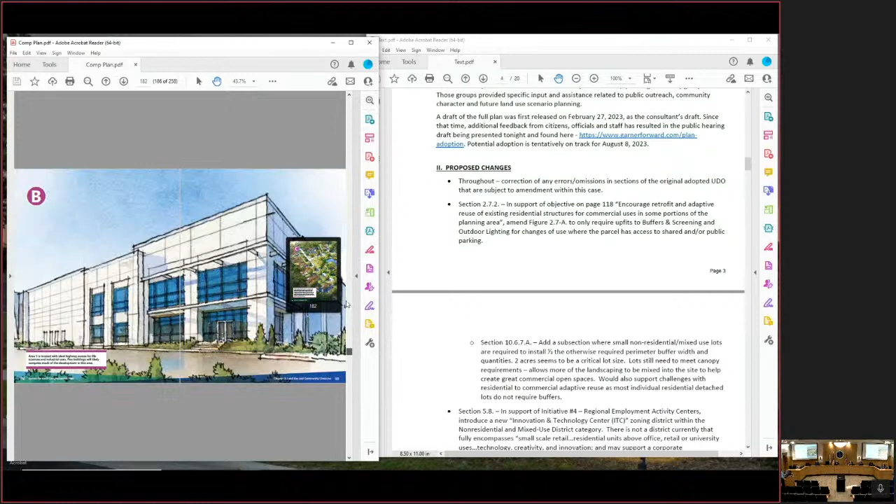What we did here is organize the amendments chronologically by section number, but also group them so you can see which amendments play together. The first one relates to page 118 in the document, and I'll try to forward these and keep them together. Let me see if I can switch to a single page view.

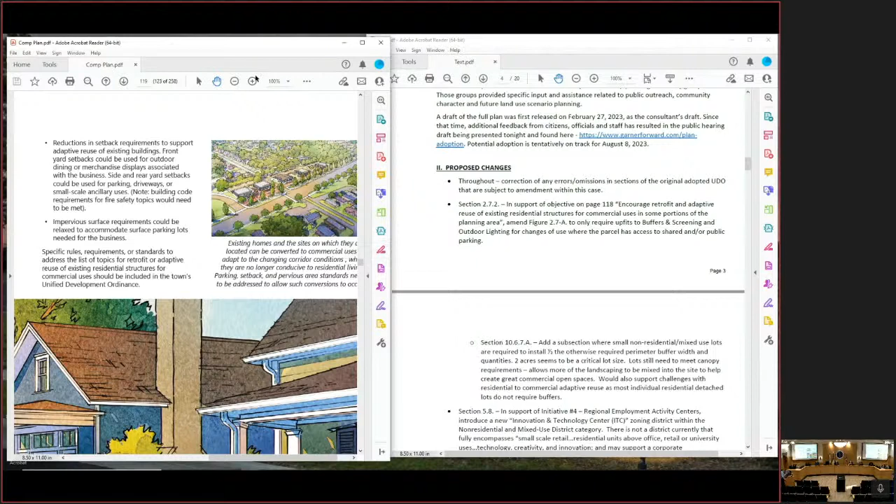And I can't see my page number. That's not good. Just a touch. Well, it's not 120, 118. Okay, so there we need to go.

All right, so one of the objectives there, and when I'm saying the objectives, I'm referring to the green text, which is what Matt pointed out to you would kind of form the rubric of what we would be examining future rezonings against, kind of somewhat similar to the list of items that you get at the end of your staff reports today. And so the goal there, or the objective there, is to encourage retrofit and adaptive reuse of existing residential structures for commercial uses in some portions of the planning area.

So currently in the UDO, that's not a very easy process to go from residential to commercial. There's a number of building code issues that come into play already, but the zoning ordinance also makes it quite laborious. Specifically, the nonconformities chapter, section 2, treats those as a change of use, and that change of use then triggers virtually almost complete compliance with all the regular standards of the UDO, which, as you can imagine, standards for residential when it comes to everything - parking, landscaping, lighting - is much different than for a commercial parcel.

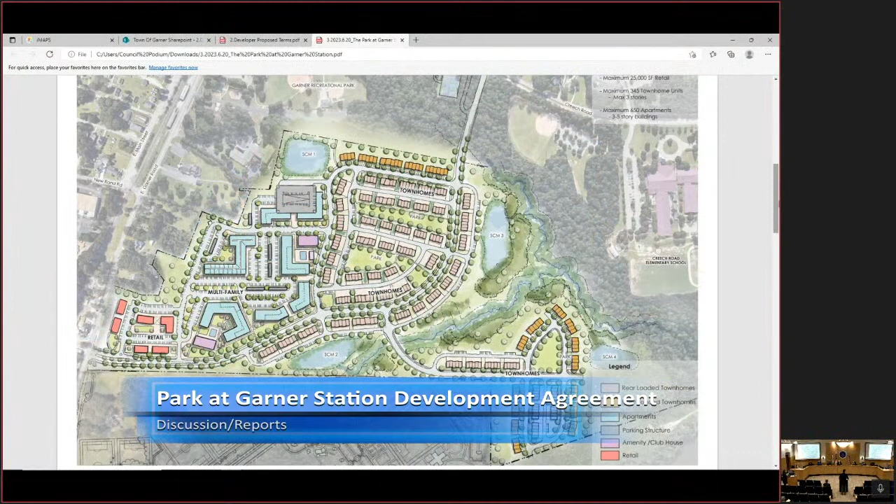I'm Matthew Carpenter with Parker Poe, 301 Fayetteville Street in Raleigh. As Robert mentioned, the overall project here is the Park at Garner Station, a large mixed-use project with commercial space, apartments, and townhomes covering over 97 acres on East Garner Road. It's a really large project, and projects of that size require careful planning and coordination that we've been going through over the last year or so.

With such a large project, there are often multiple stages of approval, and two of the early stages are what we're in now: the planned unit development rezoning, which is currently pending and still under staff review, and then the development agreement, which is the focus of discussion this evening. Although those two processes are related since they're for the same project, they are separate items that require separate hearings, as the town attorney mentioned, and review cycles.

Over the last several months, we've been working with town staff and the town attorney's office to get to a term sheet that we felt was close to the final terms we're going to put in the development agreement. The goal of that term sheet is to set the stage for the formal development agreement that we'll draft after tonight's meeting. The goal for tonight is to get your initial feedback on those terms, and then take that feedback back and incorporate it into the development agreement as we move forward.

For that reason, we might not have answers to all of your questions tonight, but it does allow us the opportunity to hear your concerns and comments before we get to the public hearing with the development agreement and the rezoning application. In that same vein, there are a lot of conditions in the PUD text that are zoning conditions that will apply to the property. Since those are part of the PUD discussion, we won't delve into all of those tonight, but you will hear about those over the next couple of months.

One of those improvements is the major collector street that you can see on the plan that connects the project and Creech Road. The goal of that collector street is to improve overall connectivity by establishing an east-west connector there, and then also completing a street that's shown on the street plan. It also serves as our second point of primary access that's required under the code. The plan is for the developer to fund and construct the entire portion of the major collector, and we're not requesting specifically for the town to pay for that road.

One of the challenges is that the location of the road goes over Garner Recreational Park. Because the original funding for the park received federal funds, we're required to pursue a permit to build the road over the park property. What we're asking for in the term sheet is for the town to work with us in obtaining that permit from the State Parks Department. It's actually issued from the Federal Parks Department, but you go through the State Parks Department, so several different bodies will be involved. We're not asking to completely finalize that process now—the term sheet is just asking for the town to collaborate with us in filing that application.

We're also constructing a local street along the shared property line with Yeargan Park. The goal there is we've worked with staff to line the edge of that street up with the property line so that Yeargan Park can easily connect to that street when the time is appropriate to provide cross-access. We think that'll be a better cross-access connection than the dead-end street that was previously planned. There are also several Parks and Rec improvements contemplated in the development agreement term sheet.

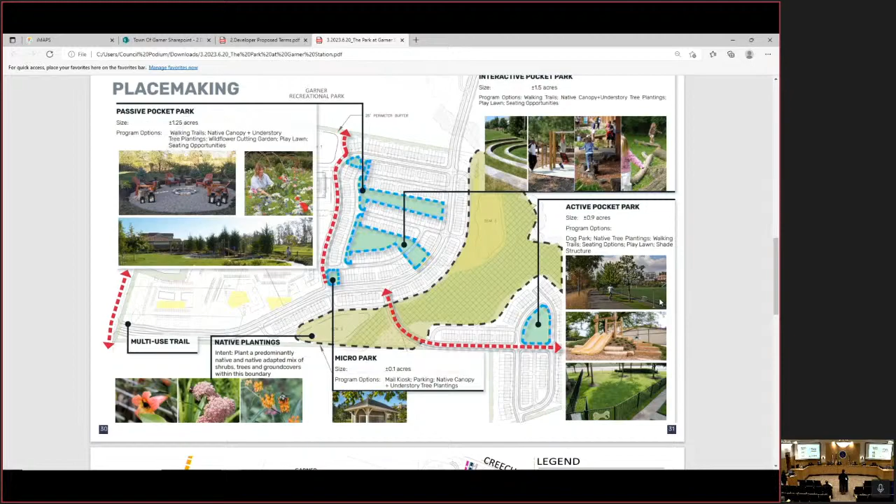And it's not surprising since we're surrounded on all sides by parks. So one of those commitments is that the developer will construct two public multi-use paths across the property. One of those will extend across the Garner Recreational Park property to connect the park with the development, and then ultimately to Yeargan Park.

So there are several, and those are just the Parks and Rec improvements in the term sheet. There's a whole slew of open space and parks commitments in the PUD that we'll discuss at those hearings. And then finally, the term sheet also addresses sewer improvements.

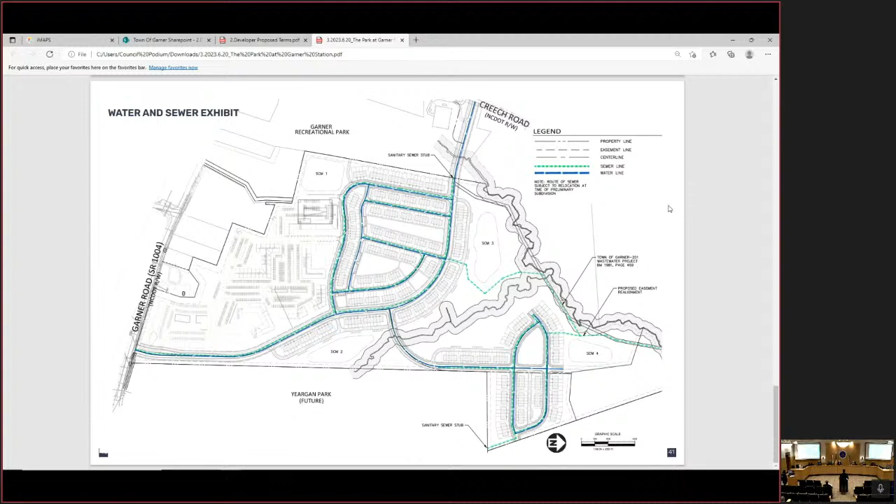For this project to connect to sewer, the developer will be constructing over 1.2 miles of sanitary sewer. It's to the north of the property, to the right of your screen. That's a big part of this project because it's a ton of linear feet of sewer connection, and it'll also help with the Yeargan Park connection.

I know there was a lot of money as part of phase 1 of Yeargan Park to make a sewer connection, and these improvements will allow the park to connect to the nearby Pulte project, and hopefully save some capital expenditures there. Part of the process for obtaining approvals to build that sewer extension is that we've got to obtain a permit from the Army Corps.

Because a lot of the extension is through the creek north of the property. So what you'll see in the term sheet is that we've asked the town to work with us on that, and there have been some further discussions today between staff and Mr. Shunk on exactly what that will look like. It's also probably going to require some coordination with the City of Raleigh. So in that sense, it's kind of an agreement to agree to get the sewer done to the north of the property, which will benefit the project and Yeargan Park.

So overall, we think we've reached a term sheet that provides the developer certainty that the town will work with us in pursuing the needed improvements, and also provides the town certainty that the project will be built and the significant public contributions to the infrastructure will be realized. So with that, we appreciate your time tonight, and we're happy to answer any questions.

At the intersection of New Rand Road, through conversations with John Hodges, we've met with the North Carolina Railroad. We will be putting in a traffic signal at New Rand and East Garner Road. And there will actually be two signals, one at New Rand and East Garner, and one at New Rand and Main Street. They will be signaled and timed all together. It'll act as one, but you'll see two actual sets of lights there.

The signal design and the signal installation itself is going to run about $1 million, and all of the improvements from New Rand down East Garner Road is going to be about $2 million of improvements.

And all those improvements are going to be on the north side, as it should be, correct? All of the improvements will be on Garner Road, on the north side. There'll be an eastbound... getting the maps turned, I'm getting my easts and wests confused. But anyway, there'll be an eastbound right turn lane off of Garner Road onto New Rand Road.

The reason I bring this up is years ago, Wake County School System was looking at putting a high school here. At the time, with the traffic from a couple thousand students, you'd have 1,000 homes and a couple thousand vehicles, and one of the proposals was going to close the New Rand Road intersection. That was back then, not very popular. That's why the town got on board and helped them find land elsewhere. So that's one big concern I have, the impact and the improvements on the road, because that was how they were going to try to alleviate issues by just closing that intersection, which would have been devastating for the downtown.

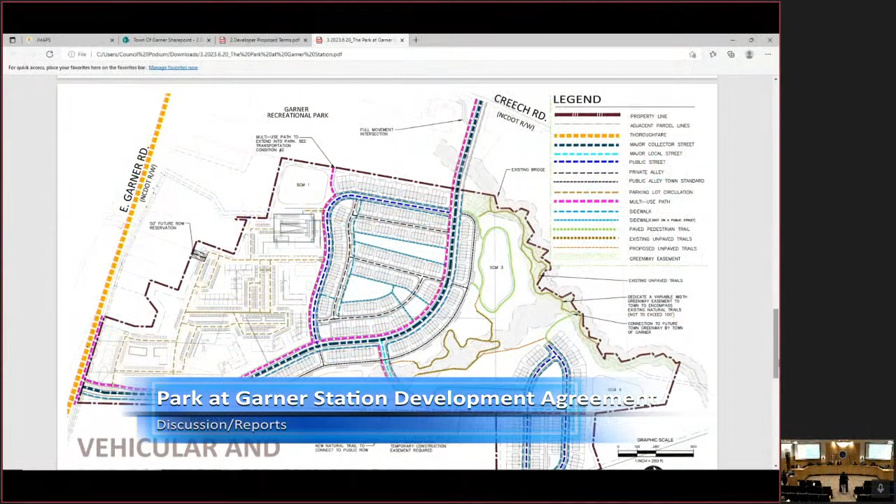So what you're saying, there'll be a 3-lane section between our entrance and New Rand Road? Right, a lot of opportunity for queuing. And then at Creech Road, there'll be a southbound left turn lane onto the collector. So you'll come past the elementary school, and then there'll be a dedicated left turn lane to turn into the collector street. And that'll also relieve the intersection there at Creech and East Garner.

You talked about road improvements going west on Garner Road, up to New Rand Road or past it. Will there be improvements some distance past New Rand Road? No, the only improvement on the other side of New Rand Road will be an eastbound right turn lane. So if you're coming from the Performing Arts Center, as you approach New Rand Road, there will be a dedicated right-hand turn lane. That allows people to keep going straight eastbound towards Jones Sausage, and there'll be a turn lane for people to turn south on New Rand.

Okay, let me see if I'm hearing you correctly. You said signalization—are we talking about stoplights? Yes, ma'am. There is a pedestrian crossing marked there, but it's impossible for anybody to cross as it is now. Do you anticipate that will be a safer option with the stoplights? Yes, there will be a stop control there.

I live in the area, and one of my biggest concerns is that section of road from Jones Sausage Road all the way to Creech Road is a speedway. People seem to floor it when they get in sight of the Creech Road stoplight to see if they can get through before it changes. So a stoplight at New Rand Road will certainly be welcome, but I'm concerned about the volume of traffic increase there. Also on Creech Road, the collector street coming out is not too far from where the road starts to curve significantly. I am concerned about people driving safely there and not taking into account the topography, which is less than ideal.

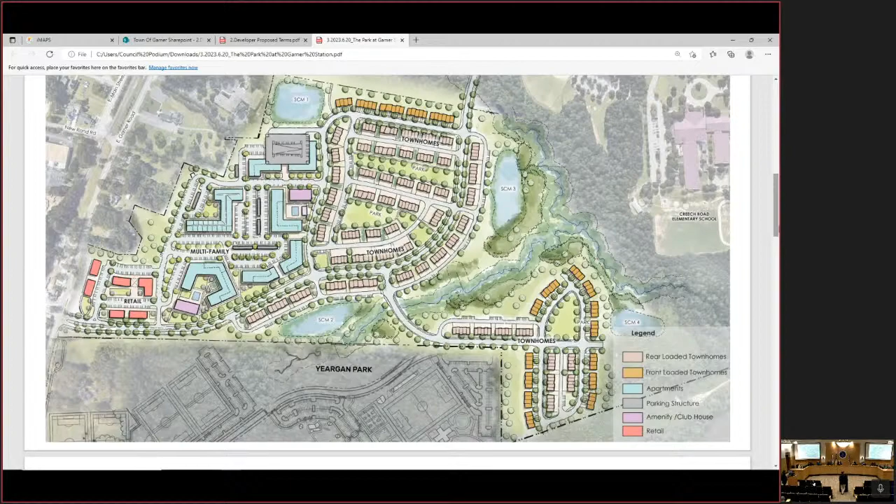I want to make sure that when it comes to us there is a real diligent calculation of that, because the PD is very specific about common recreation and usable open space, as it's worded. So usable is important, and the definition later in section 8.4 delineates certain areas that can't be considered. I just want to make sure staff looks at whether there's the adequate amount of usable recreation and open space.

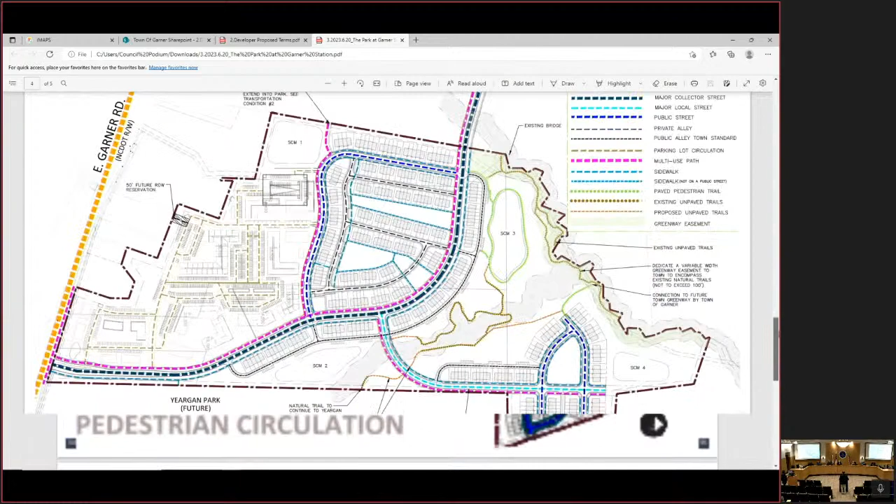You go to the pedestrian slide—go to the next one, yeah, keep going. When it comes time to the zoning, Mr. Dillinger, McAdams will be here, and since we first submitted this project back in June, we've received comments from your planning director, and those calculations were all vetted very well. The purpose of showing this slide here is—

The dashed line in pink shows all the multi-use paths, 10 feet wide, along the collector road, the local road, and also an east-west path connecting to the parking lot at Garner Recreational Park. In the open space area that remains all wooded, the tannish colors show a combination of existing trails and additional trails we're proposing. The green line going around that one pond is a trail as well.

So there is a considerable amount of pedestrian connectivity through this park. It's a little deceptive because your stormwater areas are not considered part of the open space. And if you remove those elements, it's very questionable if you're hitting the 25% of the gross area. So I really think we need to look hard at that.

I do have other comments, but I think they're more appropriate for a closed session based on some of the ideas related that they're permissible related to real estate. But I don't have any other public comments at this time.

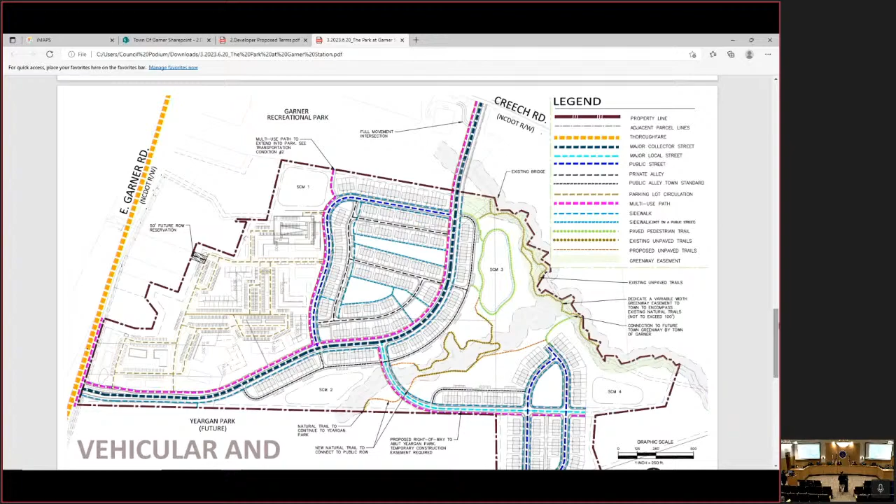It's the size and scale of a road where we don't want overly burdensome traffic calming, but there might be a way to reconfigure that road so it's on the other side of those properties, keeping all of the neighborhood on one side. Does that make sense? Yeah, I understand. I know you don't want to change it.

Yeah, so this gets more into the zoning, but your town staff asked for a certain roadway section to be built through there - a major collector section. That section was a 3-lane road all the way through with bike lanes on either side, and I have a problem that we sometimes in this country overbuild things. So we've had a few conversations with your staff about pulling that in, putting in left turn lanes where appropriate, but not doing a continuous 3-lane section all the way through.

We removed the bike lanes but replaced that with a multi-use path on the side, trying again to narrow the road so people crossing aren't... I think the cross section was like 59 feet of asphalt, but now it'll be two 11-foot lanes, and at the one main intersection there'll be a left turn lane. Other than that, the collector road does meet all of the minimum radii standards that your street manual requires. I'm hoping it doesn't become a raceway through there.